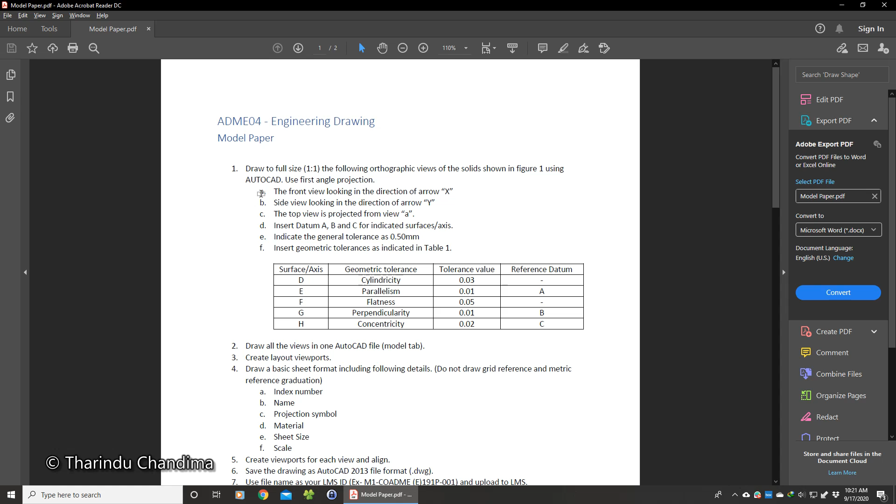So our first question is, draw to full size the following orthographic views of the solids shown in figure 1 using AutoCAD. Use first angle projection. So the orthographic views are the front view looking in the direction of arrow X, side view looking in the direction of arrow Y, and the last one, the top view is projected from view A, that is from the front view.

So your front view should be like this, and your side view should be like this, and your top view should be projected like this. So when you get this kind of figure, first of all you will have to draw it on a paper as a rough sketch. In that way you will understand the final front, side and top view. Based on that you can start sketching in AutoCAD.

So now I am going to do the rough sketch, but remember that I am not going to mark any dimension on the rough sketch. I just want to have the basic shape and the basic features. First of all, I will draw the front view, but remember that you have to draw feature by feature. First of all, I will draw this rectangular piece, and then I will draw the side view of that rectangular piece, and then the top view. So do not complete all the features in front view and then go to side view. So let's draw the front view, side view and top view feature by feature.

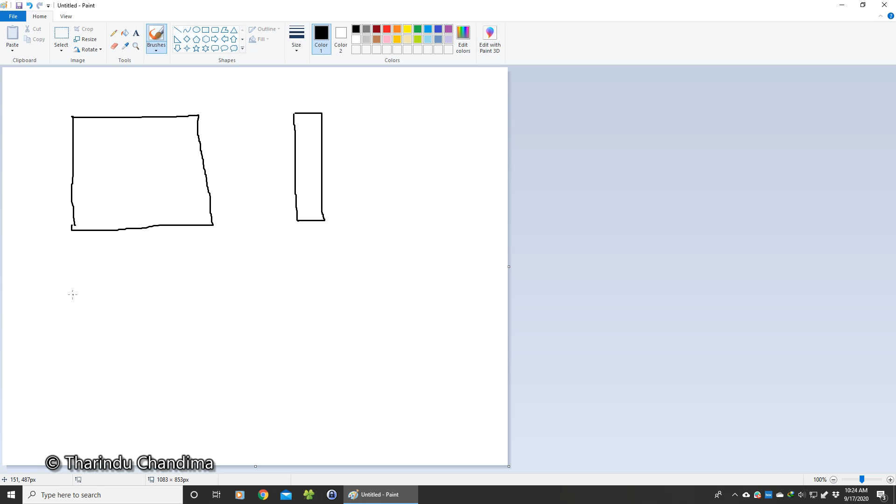Now we have completed the basic shape, and then we need to add these 4 radius. So your shape should look like this at the edge. So I will erase other things. In the side view you don't see those curves, and also in the top view you don't see those curves.

Next, we need to add these 4 holes. So the larger circle is diameter 10 and the depth is 5 millimeter, and the middle, the small circle is diameter 5 and it's a through hole, and there are 4 holes like this.

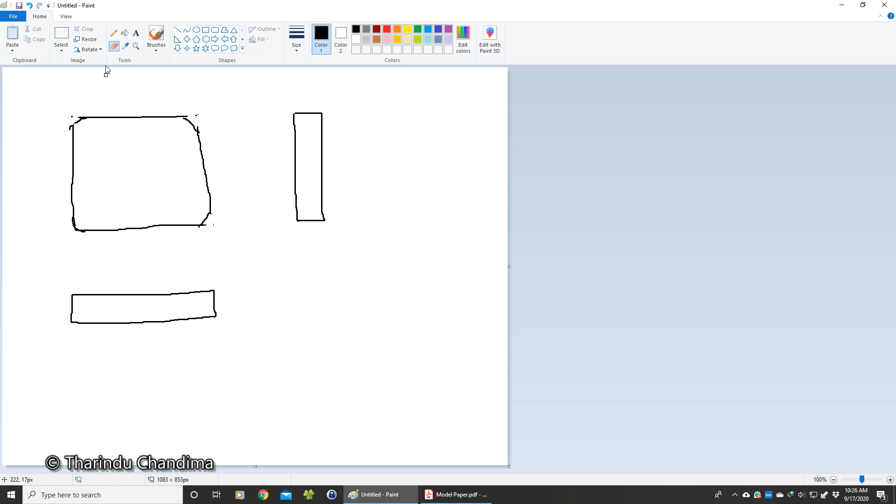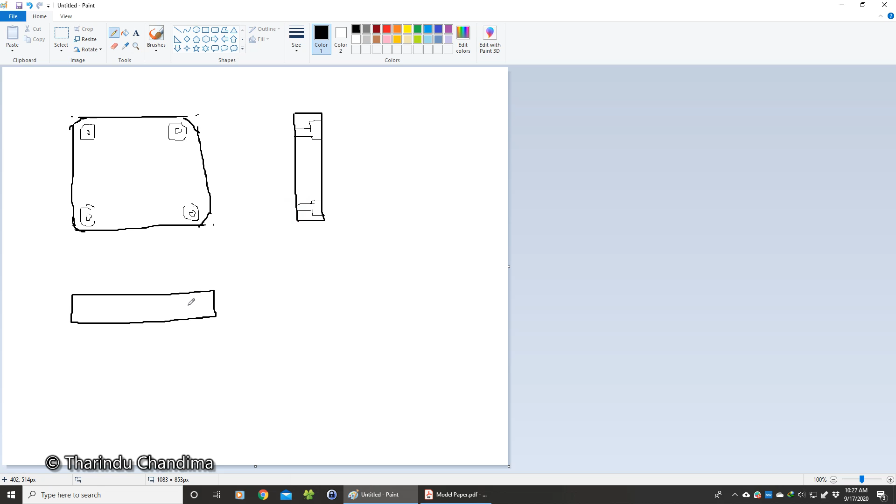Next, you need to project these in the side view. In the side view you will see this as a hidden feature, right? So I'll draw it as a solid line, but when it comes to AutoCAD it should be a dashed line. So in the top view also you will see like this.

Next, we need to draw this cylindrical section. So the diameter is like 50, and when you look at this from the X direction, it looks like this.

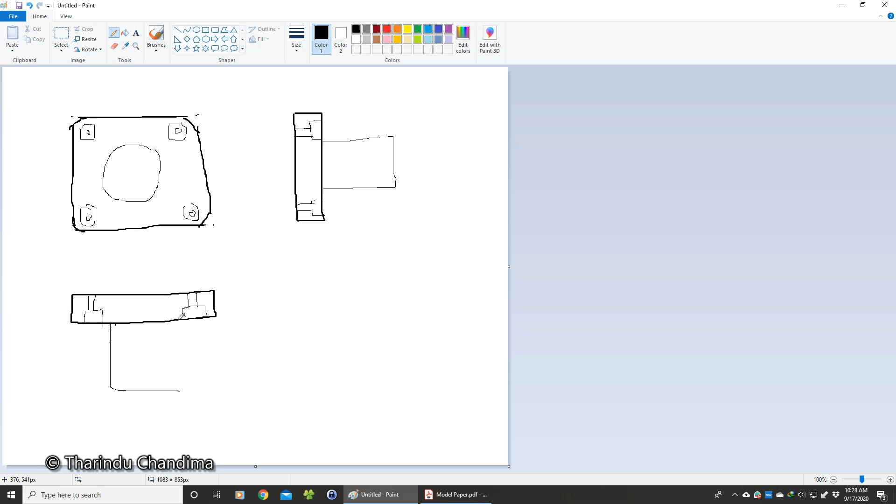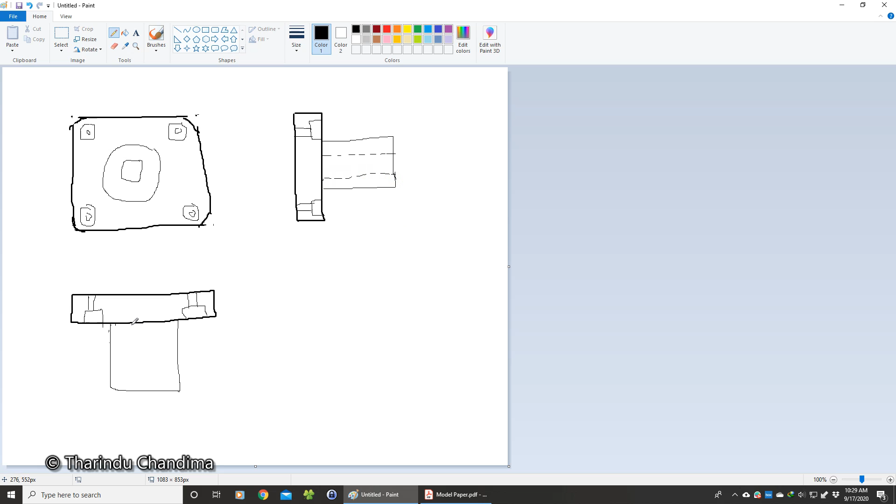Then there is a hole inside, diameter 18, it's a through hole. The same hole you can see from the top view, and it's a hidden feature like this. So since it is a through hole, it should be like this.

So now we have completed this rectangular feature and 4 holes, and then this cylindrical section, and then we need to draw this half cylinder. So in the front view you should see this surface and this area. So in the front view you should see like this, and in the side view it looks like this.

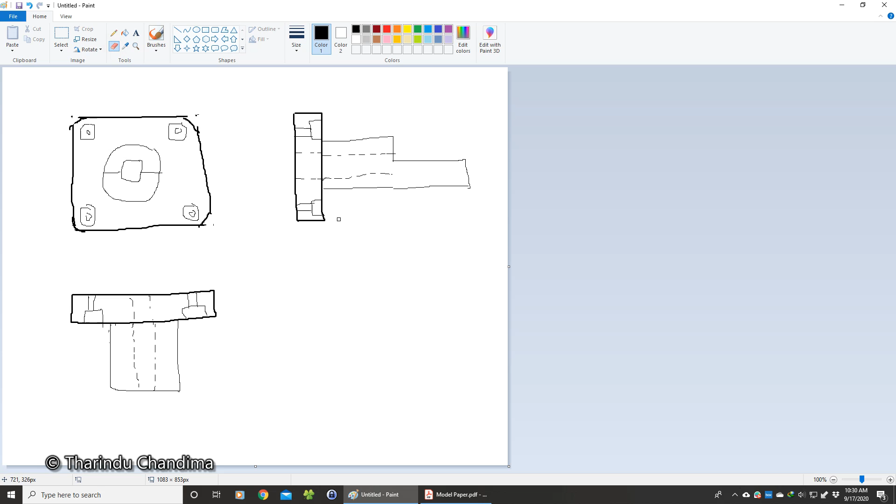Since this surface is the same, this one here and here, you don't see any line here like this. In the top view you will see like this, and in the middle you see like this.

So in the front view there is a small correction. The inside circle looks like this. So let me erase this. Right. In the side view, this one should be a dashed line, like this.

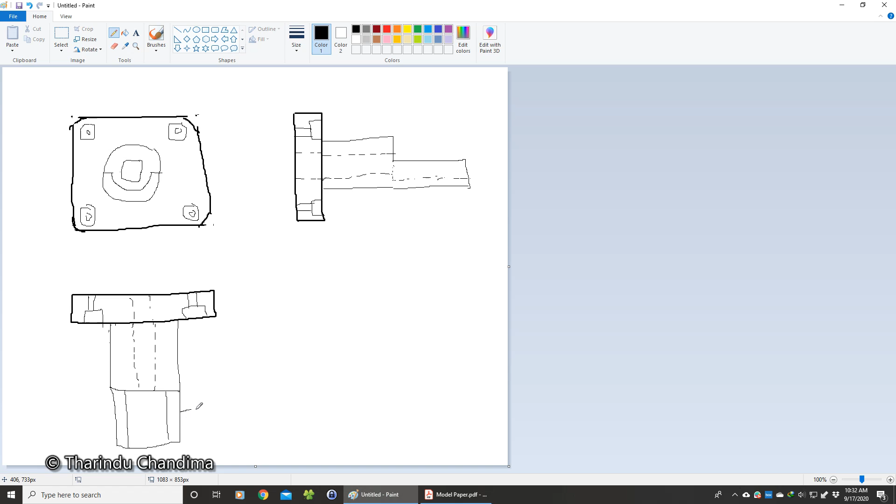Next we need to draw this feature here. So that one I will first draw in the top view and then draw the front view and the side views. So since this one is the same surface, you don't see any line here. And then in the front view it should be like this.

And you have a hole like this. In the side view it looks like this. In the middle you have a hole like this. Right.

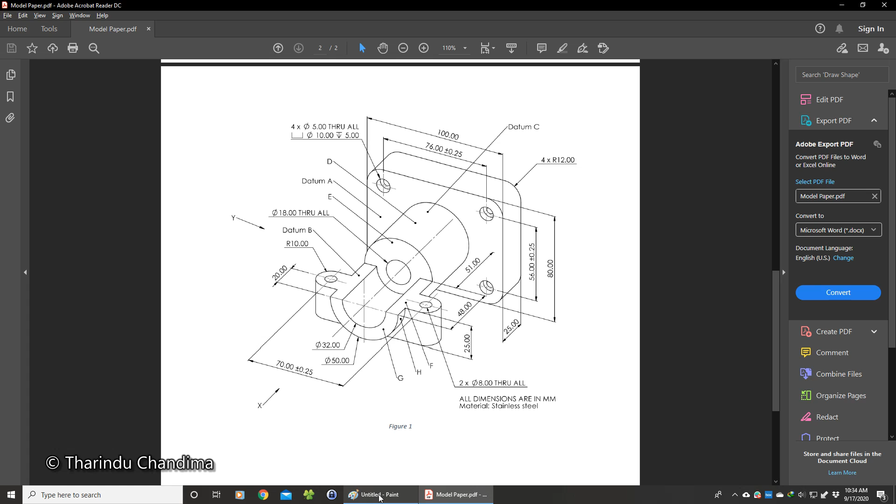So I think we have completely drawn all the features. We are not going to put any dimension. Now we can start drawing using AutoCAD.